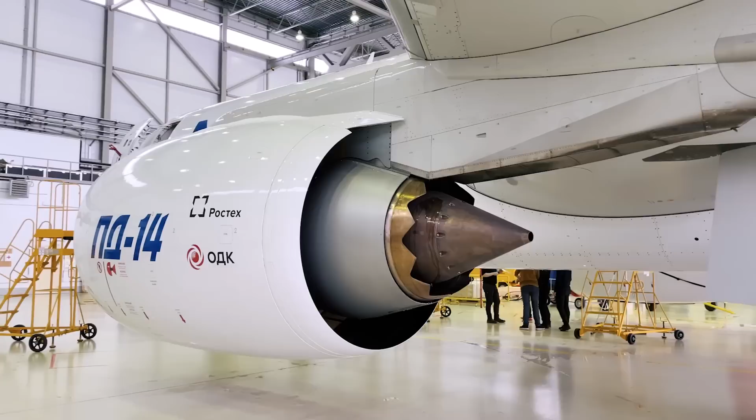Today we will get acquainted with the first completely new Russian civil aircraft engine in several decades, find out what solutions and technologies it has incorporated into itself, and how it pulls forward not only the aircraft, but the entire industry. I present to you the PD-14.

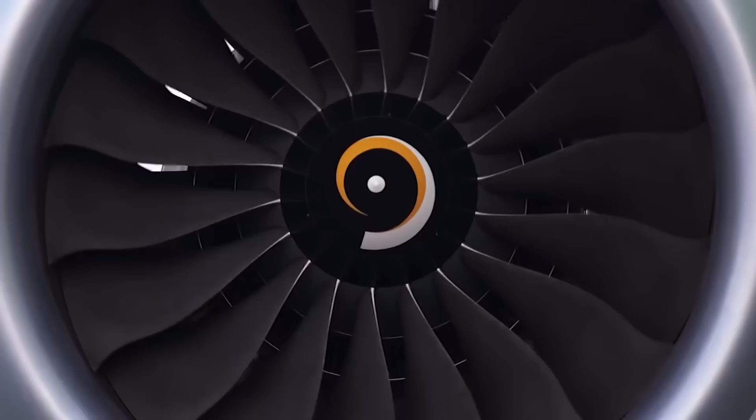Despite the fact that the PD-14 started flying recently, its history is quite long and full of adventures. In the late 2000s, the SSJ-100 airliner entered the home stretch before the start of deliveries. A completely new modern regional jet, ambitious but without extremes. However, progress is necessary, and having created the Superjet, the aviators decided to make a medium-haul jet and enter the market with the largest volumes, which has long been ruled by the Boeing 737 and Airbus A320.

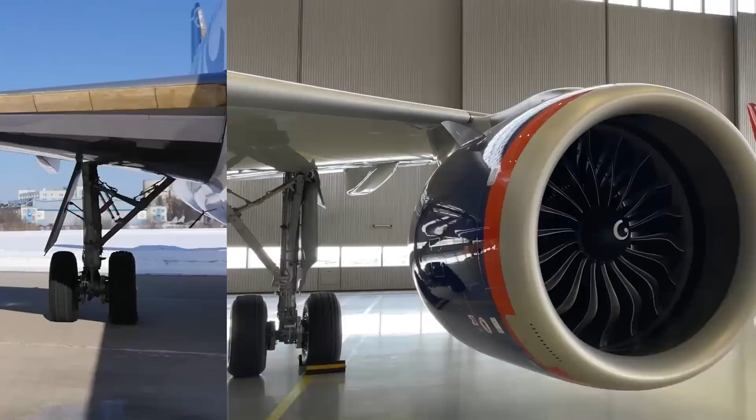Moreover, they had to fight for this market with their new generation, and the MAX and NEO are Goliaths, the main trump cards of which were the latest aircraft engines. The future MC-21 airliner was supposed to be a huge leap forward, and the engine issue was one of the most important. The bar is clear, the power plant must be at least at the level of competitors, otherwise no matter what the plane is, no one will need it. The first and most obvious decision was to install the same engines as the competitors. And it was accepted. The MC-21 is offered with a Pratt & Whitney motor, one of the leaders.

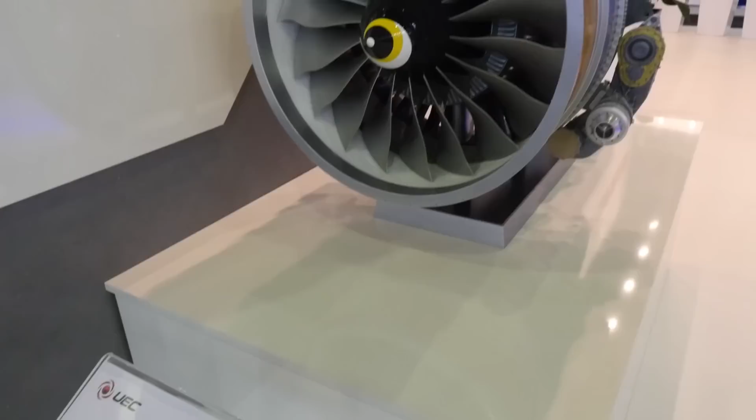However, at the dawn of the program in 2008, the newly formed United Engine Corporation, UEC, proposed another road that the aviators decided to take, to create another engine, a Russian one. In the beginning, this decision seemed like a gamble. The engine that had to be created had no right to be inferior to counterparts, and the counterparts, the most advanced motors in the world, are the results of decades of evolution within the walls of huge corporations. There are only a few of them in the world. It seemed that the Russian engine-building industry, which had been in a semi-comatose state for a long time, simply wouldn't catch up with them. While the world giants of the industry had to take 3 steps, the UEC would have to take 10. But the project nevertheless was launched.

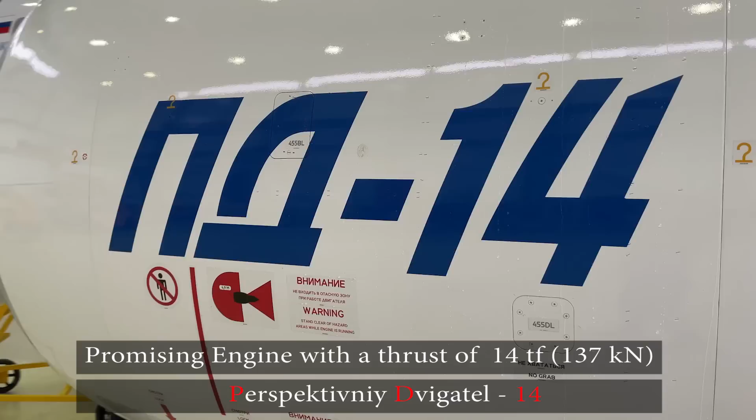Considering that the engines are intended primarily for the MC-21 family, which includes several airliners of different dimensions, the thrust of the engines for them ranged from approximately 123 to 153 kilonewtons. The promising engine, in Russian Perspektivny Dvigatel, with a thrust of 137 kilonewtons or 14 tons force, was supposed to become the base one, and this is how the name PD-14 appeared.

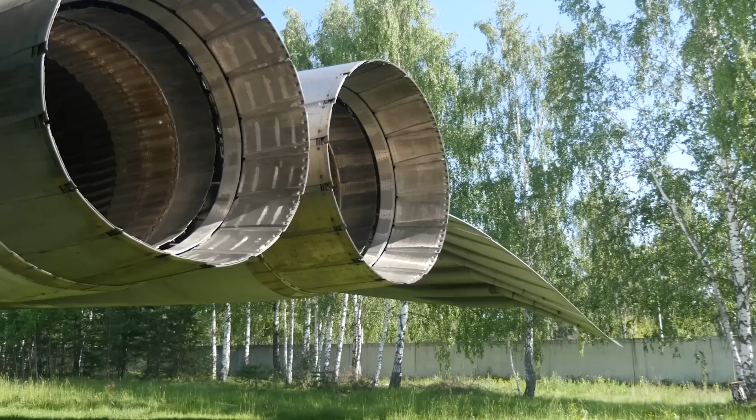And now a cold shower. I will not be telling the success stories of a team of lively adventurers, just as I will not be throwing loud phrases about an incredible breakthrough of an unparalleled mega device, from one sight of which desperate competitors panicked and closed. The creators of the PD-14 soberly assessed the opportunities, problems, and risks. Yes, the accumulated potential is very large, but the lack in a number of technologies is large too, and it needs to be fixed, moreover, in a short time. The best is the enemy of good. No one will wait 20 years for an epic and ahead of its time museum exhibit that never made it to the series as unnecessary.

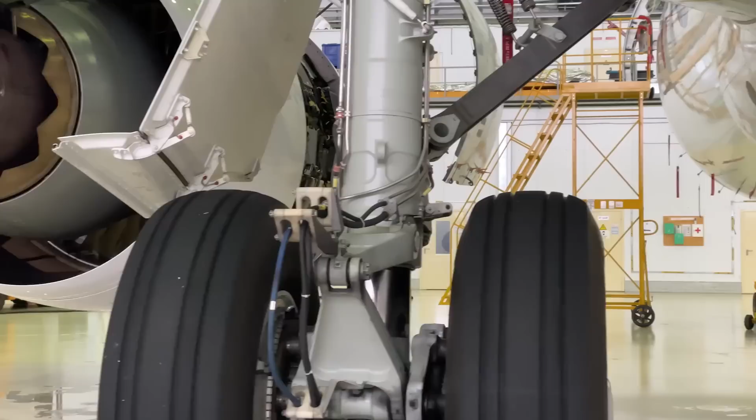So, the task was clear. The PD-14 has to be a modern, efficient, environmentally friendly, and competitive engine. No more and no less. You can't lag behind, but you can't chase incredible innovations and wow effects either. I repeat, the UEC needs to take 10 steps, and any unnecessary risks could kill the project in the bud. Even with a conservative approach, the PD-14 is supposed to be one of the top engines in its class, and a very serious challenge. We're not talking about modifying something that already exists, but about a completely new engine that incorporates both the best solutions available and a lot of completely new technologies that have not been previously used at all. Russian engineers have not had tasks of this scale since the 1980s.

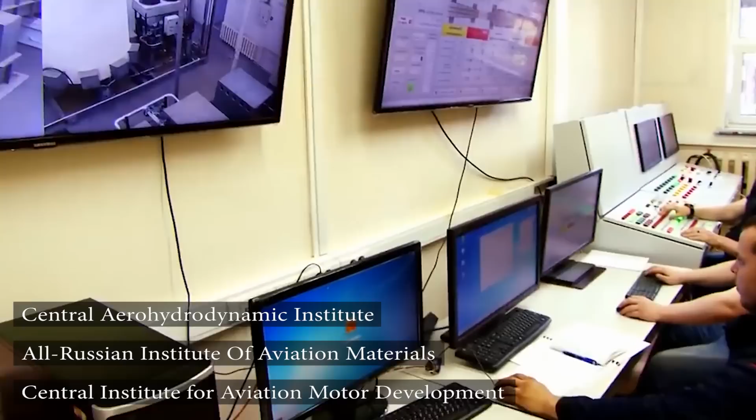Once the program was initiated, the entire industry got involved. The UEC Aviadvigatel became the head design bureau. Related work was deployed throughout the country, including both university labs and giant aviation centers, such as TsAGI, VIAM, and TsIAM. All aspects were worked out, from aerodynamics and computer modeling to mechanization and materials.

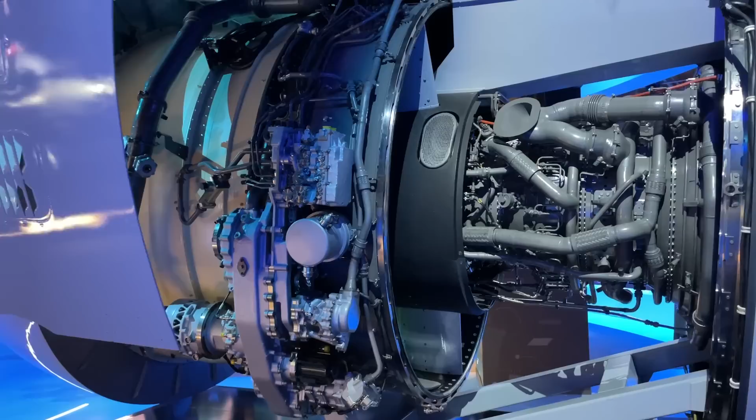At the same time, production workers got down to business. The components of the new engines are being manufactured at many sites, and the main one among them, the place where the finished engines will be born, is the UEC Perm Motors plant. All of them faced a serious modernization.

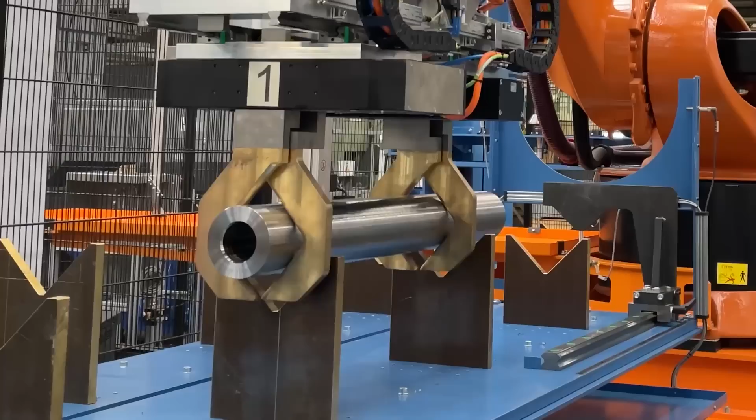The corporation was reformed, the reconstruction of facilities began, centers of competence, new production facilities, and laboratories were created. Personnel was retrained, and the latest equipment was purchased. Thousands of machine tools, robots, and entire platforms. The PD-14 managed to push the whole Russian aviation engines industry forward, even before it lifted the plane for which it was created.

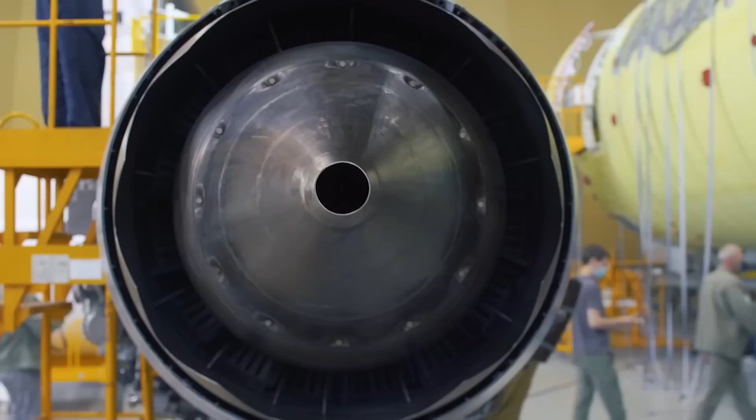Nevertheless, despite the complexity of the tasks set, the work was carried out actively and quickly. Already in 2012, the first prototype for ground tests was assembled, and in subsequent years it was joined by more and more prototype brothers. In 2015, the engine saw the sky from under the wing of the Il-76 flying lab. The main stage of testing was carried out on it, which ended in 2018 with a certificate from the Russian aviation authorities. After that, the PD-14 went under the very wing it was created for.

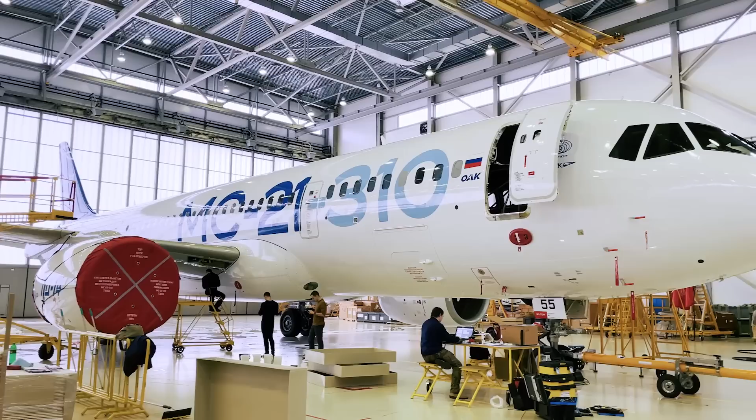The airliner in the basic configuration with the PD-14 engine received the MC-21-310 index, and finally, in December 2020, took to the skies. At the initial stage of testing, pilots behaved more carefully with the engine, but rather quickly they began to push it to the limit, and the PD-14 showed itself quite decently, without limiting them in any way.

The MC-21-310 conducts dozens of tests, participates in demonstration flights, and flies over long distances, including outside of Russia. The Dubai Air Show was the airliner's first overseas tour, and there were no particular issues with the engine's operation. But the tests continue too, and at times with curious stages.

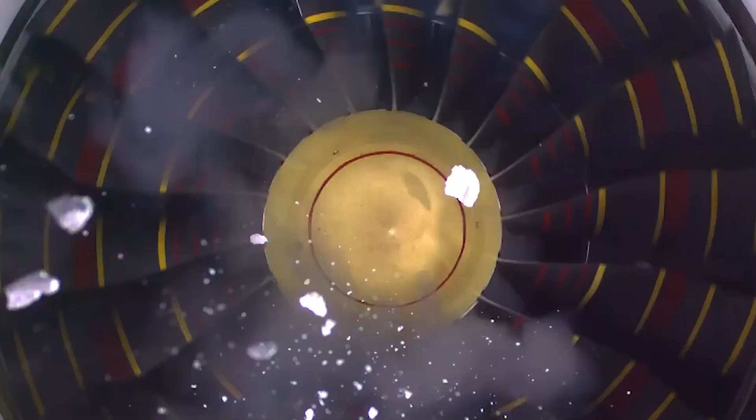Recently there was a test for the reliability of the power plant in flight conditions in clouds of volcanic ash. Previously, no one was particularly interested in such situations, but a volcano erupted in Iceland which closed the airspace of half of Europe. And while the whole world was trying to pronounce the name Eyjafjallajökull, the aviation authorities thought about flight safety. The test became a non-trivial task.

At the stands, the aviators drove real ash of Kamchatka volcanoes through the engine, checking its ability to function in such conditions. And this work was new not only for Russia. New requirements and such tests had not been carried out on a large scale before.

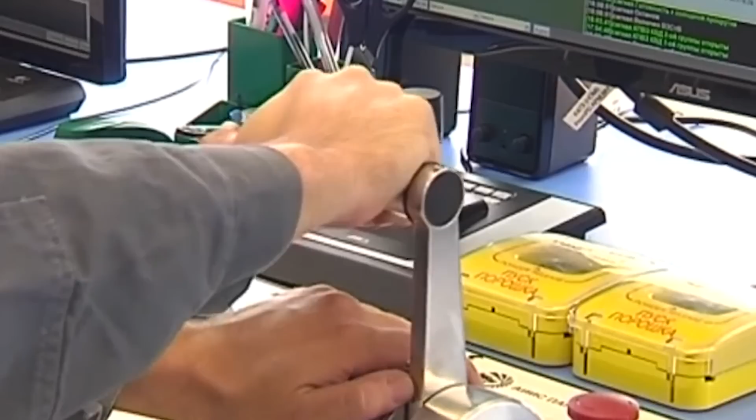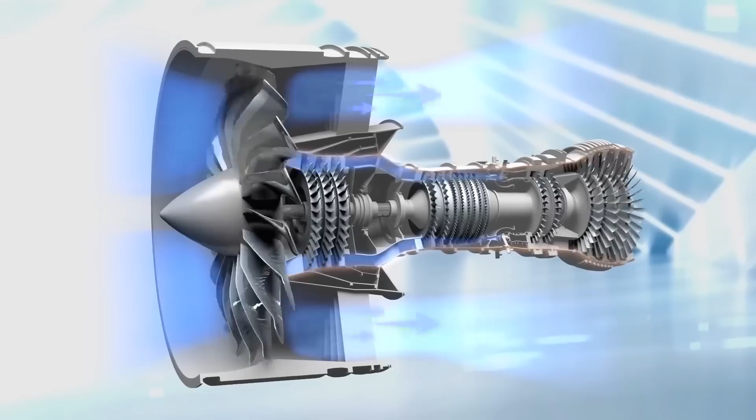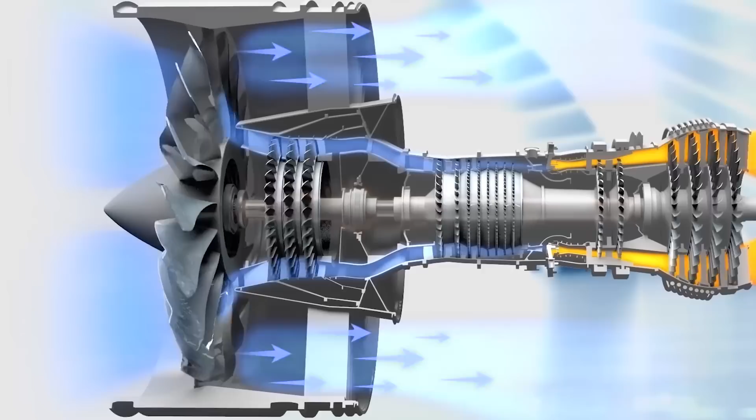And so, let's figure out what this whole industrial dance revolves around. The PD-14 is a classic modern turbofan engine. The airflow in it moves along two circuits. In the core, the air is compressed, ignited, rotates the turbine, and is thrown out through the nozzle, creating thrust. The bypass duct starts with a large fan, which we can see from the outside. The fan spins, forcing air through the circuit, creating additional thrust and increasing engine efficiency.

Now in more detail. Let's start describing the engine from the inside out. The core is the heart of the engine, its hot part. It is thanks to it that the jet engines are called fiery hearts, for they are fiery in the literal sense. The PD-14 is a 5th generation engine, not to be confused with the famous 5th generation of fighters. No one expects these engines to have stealth, supersonic cruise, super maneuverability, and all that.

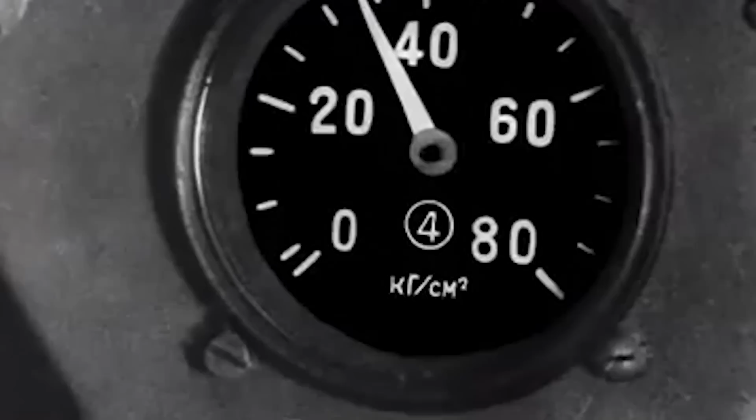One of the main parameters characterizing the generations of jet engines is the temperature of gas coming to the turbine from the combustion chamber. Efficiency depends on it to a decent extent. The early engines that appeared at the end of the Second World War could heat up to 900 degrees Celsius, and over time, by the 5th generation, this bar actually doubled. Meanwhile, the ability to work in this mode for a long time also grew. The first engines were terribly unreliable, dirty, and noisy, and their resource was often at the level of "you can fly a little." Modern engines must run for a very long time, be economical and environmentally friendly.

A balance must be struck between, in fact, opposite parameters. No one needs a super powerful but disposable engine, just like a super reliable mechanism that is unable to lift an aircraft into the air.

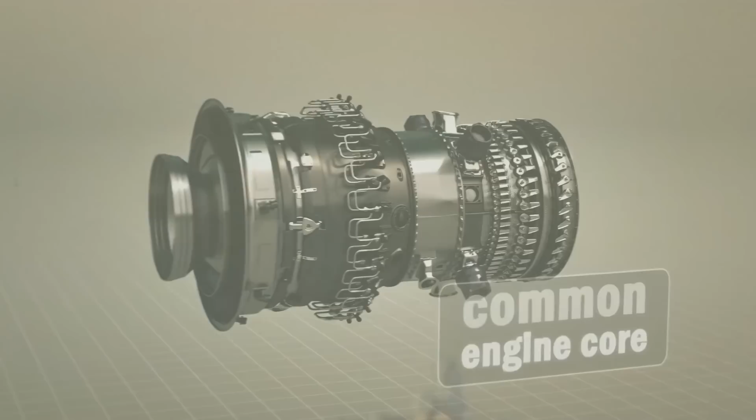In the front part there is a compressor, the task of which is to compress the air passing through it. It is driven forward by stages, rotating disc structures of complex shapes with blades along the circumference, kind of unusual fans. There are as many as 11 of them, 3 low pressure and 8 high pressure stages, and as it moves through the engine, the number of their blades increases, and the volume through which the air passes decreases, like a gorge through which a river flows.

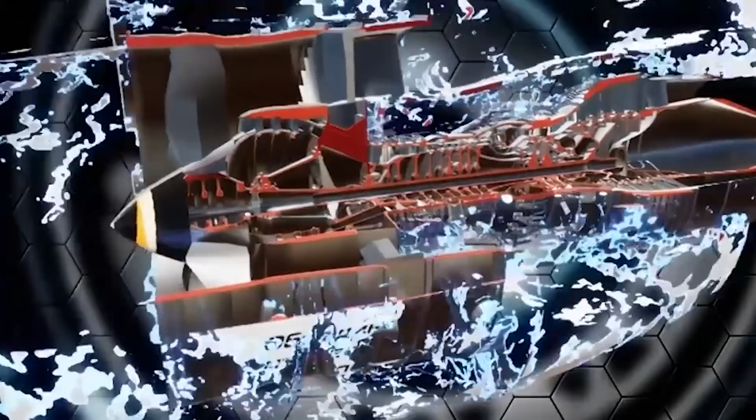Cozy descriptions should not deceive you. This is a roaring machine with discs spinning at breakneck speeds, inside which air in a split second turns from a cool breeze into hot gas, the pressure of which jumps 40 times. Following the compressor is the main hero of this fire show, a low-emission combustion chamber, where fuel is injected into the gas and ignited, heating it to almost 2000 degrees.

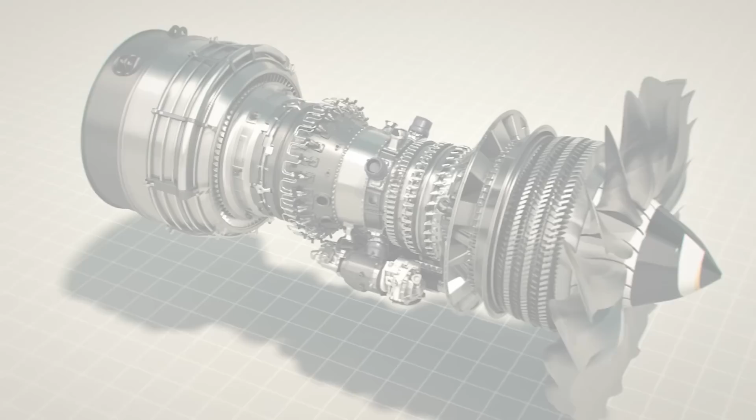The chamber by itself is a work of art. The design, with a very clever flow configuration which includes 48 nozzles, is so complex to build that additive manufacturing is used for this work. Yes, some of the parts are printed from metal by 3D printers. This is not just a desire to simplify production, and not a tribute to industrial fashion. Otherwise, it is simply impossible to make such a mechanism with the required parameters of compactness, reliability, and efficiency.

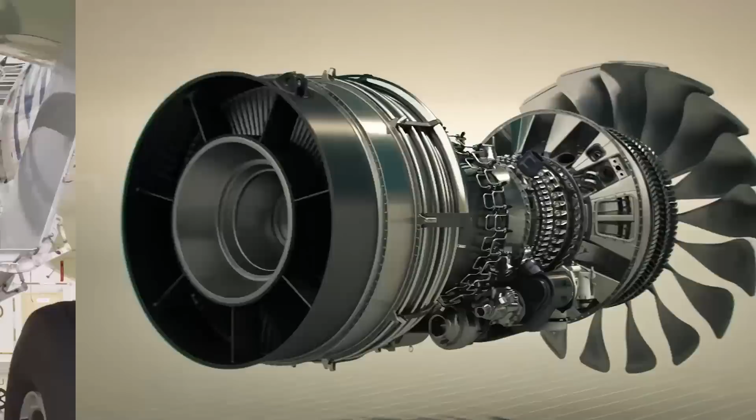In the turbine, the process is, in a sense, the reverse to the process in the compressor. Now, hot and compressed air is bursting through the mechanism, rushing first into 2 high-pressure stages and then into 6 low-pressure stages. Now the gas rotates the turbine, and part of its energy is transmitted through it to the shaft, which rotates the fan and the compressor blades, which in turn compress and drive the gas here. Such is the circulation of energies in the engine. The hot gas that passed through the turbine roars out of the nozzle, creating jet thrust.

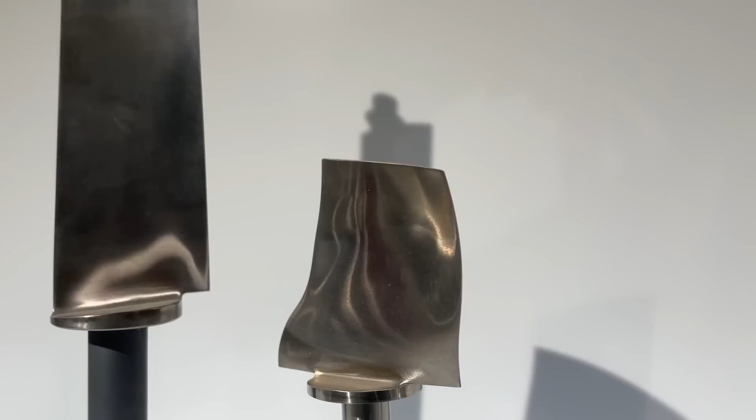The main challenge for engine builders in a core are structural elements in direct contact with the working area, primarily the blades. They must be able to withstand enormous loads without melting or collapsing. There are several solutions to this problem. Specially created high-temperature alloys from which the casings are made. I will not describe the composition, it has half of the periodic table. Inside of these casings there are special channels through which air passes, cooling them from the inside.

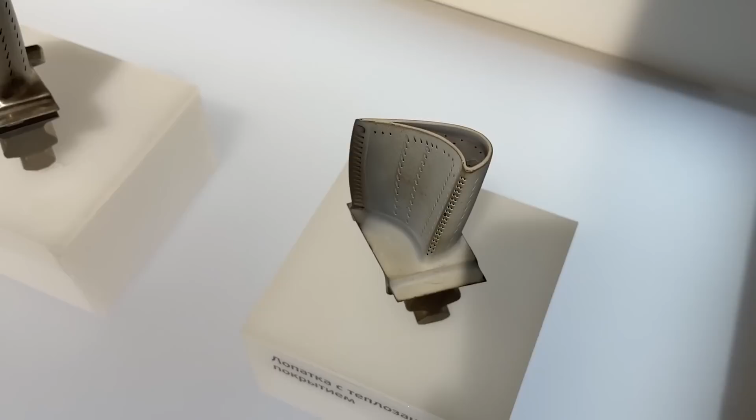As a dessert, there's a special ceramic coating that takes the first blow of heat, something like ceramic tiles that protect spaceships when entering the Earth's atmosphere. These solutions in various combinations allow the blades to work normally. Each blade, and there are hundreds of them here.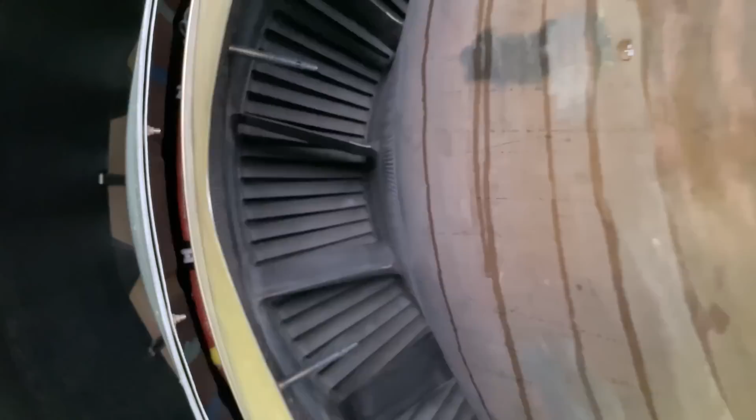So, we examined the core of our fiery heart. Now it's time to step back a little and look at the bypass duct. Everything is simpler here. There is no combustion chamber, there is no turbine, there is only one fan. But it's a big one. The description of the bypass stream of the PD-14 raises a number of questions and often becomes the cause of criticism of the engine as a whole.

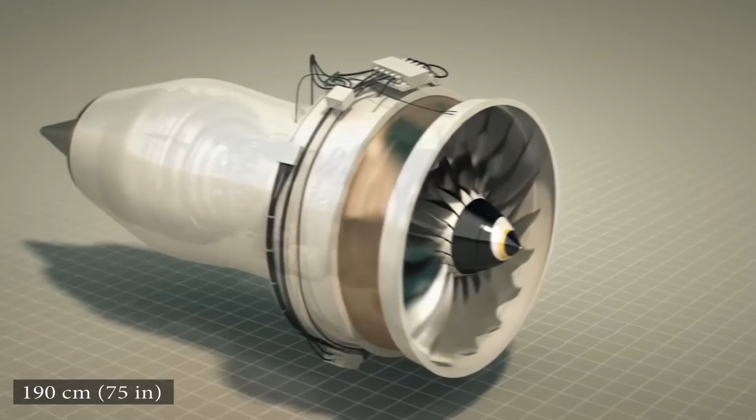2 features raise questions. The fan of the engine is titanium. It has a diameter of 1900 mm, 190 cm. Behind the fan is the main part of the engine, the bypass ratio of which is 8.5. This means that in the PD-14, 8.5 times more air is driven through the bypass duct than through the core. For modern turbofans, an important parameter that engine builders like to point out.

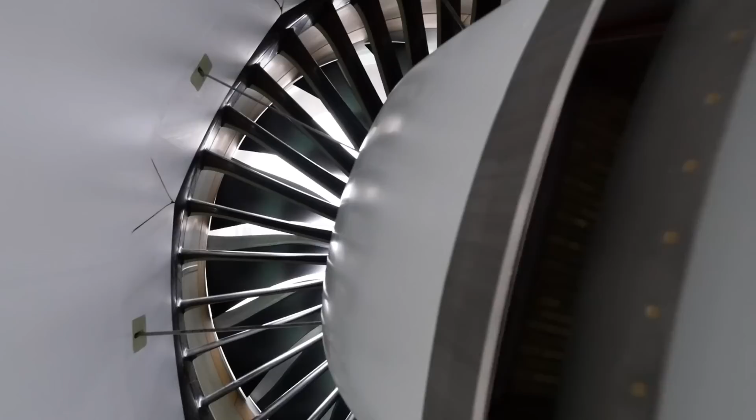And then there's a question. Fans of the competing 5th generation engines are composite and bigger, with larger bypass ratios ranging from the impressive 11 to a wild 12.5. So what's up? These parameters cannot be considered in isolation from the rest, both in the engine itself and in conjunction with the aircraft. The MC-21 introduces a number of requirements for the PD-14, which was created for it. A large fan and a high bypass ratio are good, but they increase the size and weight of the motor as well as air resistance.

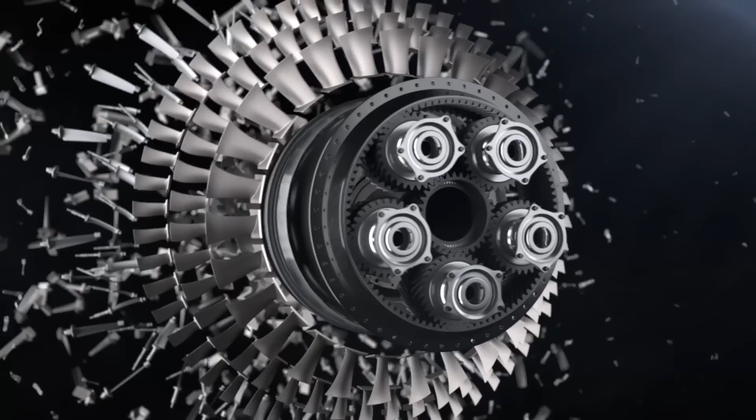Besides, a huge bypass ratio is achieved through the use of special solutions and components that complicated the engines and created a number of problems that gave both manufacturers and operators a lot of headache during the initial stage of operation. UEC, in the struggle for the optimal design, decided not to complicate things, and the performance is still very high. For example, in the engines of the 4th generation in this class, the bypass ratio is at the level of 5 to 6. And the second question.

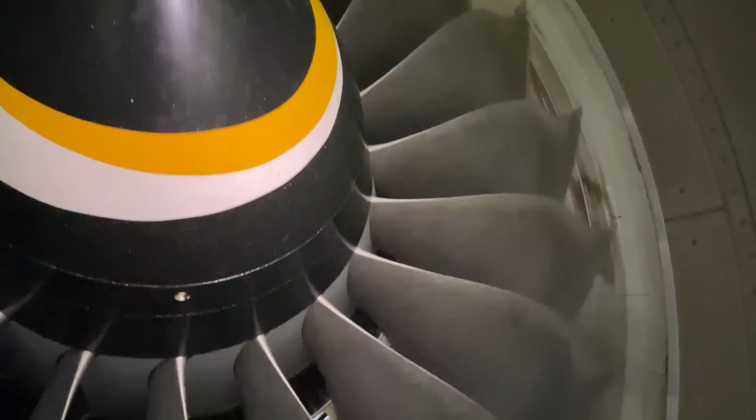The fan of the PD-14 is composed of a group of wide-chord, hollow titanium blades. In the Russian engine building, this technology has not been massively used before, and is being mastered right now. Unlike the conventional metal blades that can be seen on most aircraft engines, the new blades are lighter, larger, have a complex aerodynamic shape, and do not require additional reinforcing elements.

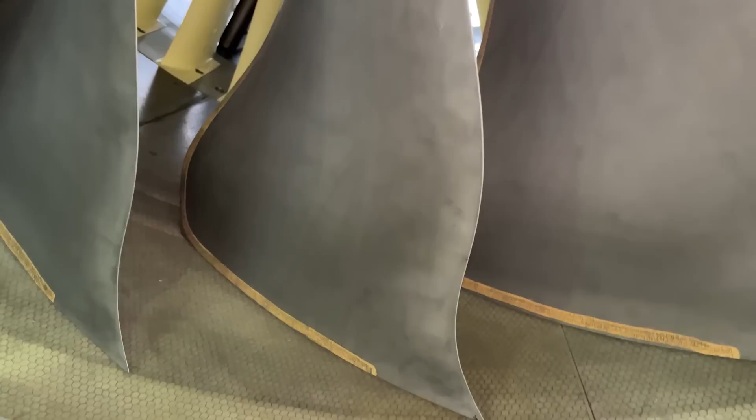Yes, they are still a little heavier than composite ones, but here, again, the question of balance is raised. Composite blades are quite complex and expensive to manufacture, and the weight advantage becomes decisive as their size increases. For example, it is pointless to put composite fans on small motors. You get the same thing for a bigger price. And conversely, on large engines, composite fans are practically the only option. The metal here will be too heavy. The 75-inch PD-14 fan is an adjacent point, at which composites and metals are approximately equal.

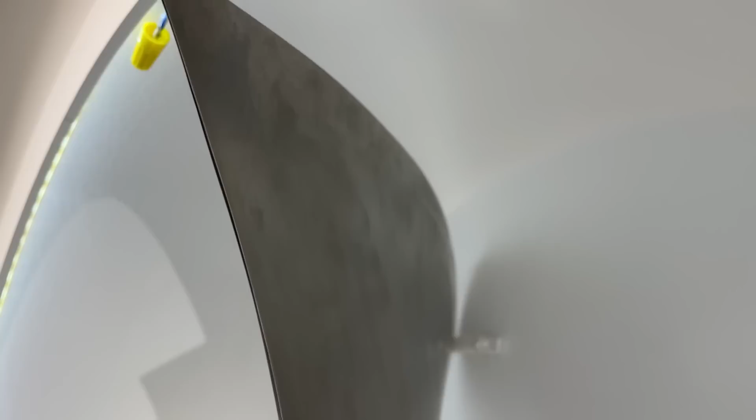The engineers evaluated pros and cons and chose hollow titanium as a more optimal option that can be mastered within the required time frame. In addition, the Russian metal industry is rich in both titanium itself and experience in working with it, including the creation of components for aircraft systems, and it is easier and cheaper to purchase from your own. It would be strange not to take advantage of such a bonus. One more reason, after mastering the PD-14, the small PD-8 will be created, which certainly requires a titanium fan, and the already mastered technology greatly simplifies the work.

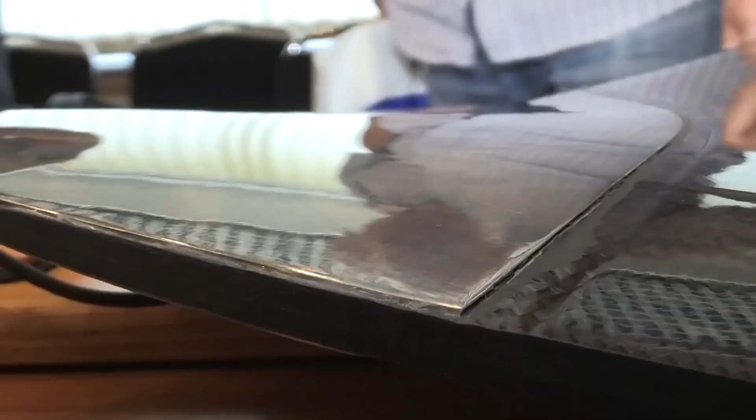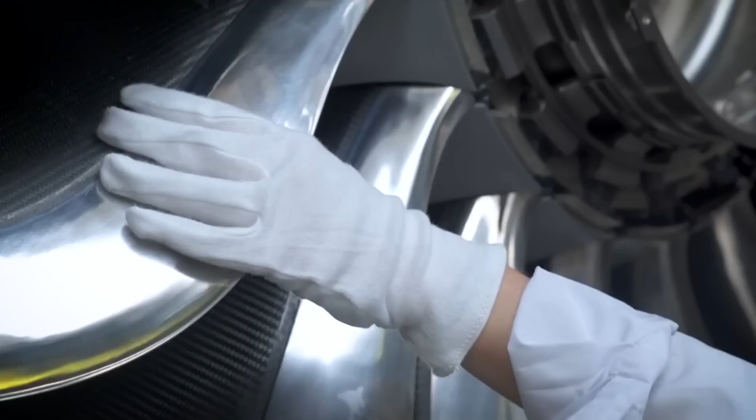The composite blades of large size for Russia are a fairly new technology. For competitors in this regard, it is easier. But you shouldn't think that they are not engaged in them. Prototypes are being created, tested, and will be installed on engines, first of all on the promising large PD-35. And with the development of this technology, within the framework of certain modernizations, the solution may well spread, among others, to the PD-14, if it is really necessary.

How did this affect the engine? The PD-14 surpasses its predecessors in specific fuel consumption by 12 to 16% and in emissions by about 30%. Further, more interesting. Conservatism in the design and a lesser bypass ratio gave both pros and cons, moreover with nuances. The PD-14 probably has a higher specific fuel consumption, but due to the better aerodynamics of the aircraft, it can maintain the required flight speed with less thrust, which reduces consumption. So, in cruising mode, it is close to colleagues in class, slightly falling behind them at low speeds, for example on the ground, on takeoffs and landings.

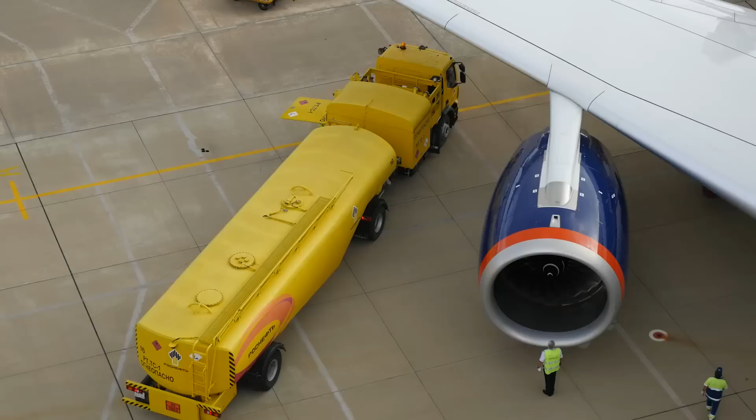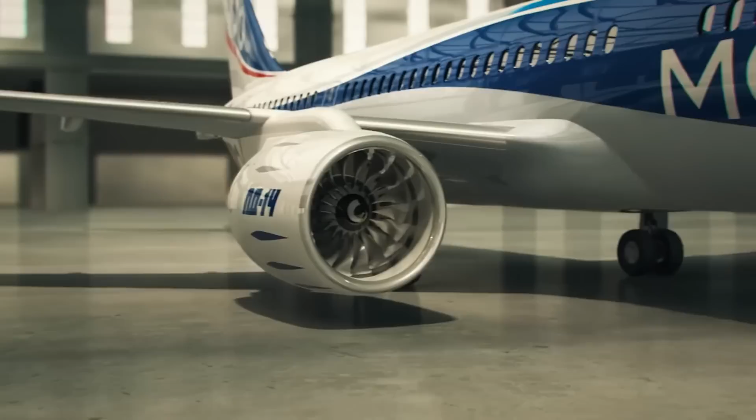In addition, if oil becomes cheaper, the slightly higher fuel consumption won't matter. This is quite realistic, given the trend of decreasing demand for fossil fuels, and the engines are created for decades to come. At the same time, conservatism gives advantages. Proven solutions, better reliability, cheaper elements, and production. The engine itself will be cheaper, both in purchase and in operation. This should keep the PD-14, considering all the parameters, at the level of counterparts. And all this had to be calculated in advance, along with a million other parameters, even before the engine itself was created. This is what you call experience and competence.

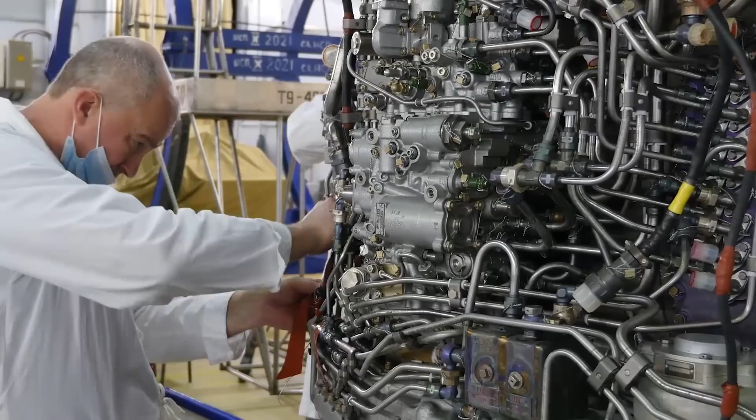Now we're gonna look at the labyrinth of devices, cables, pipes, pumps, and sensors wrapped around the engine. Usually this isn't talked about much, because go figure what all this means. But without all this conglomeration, any aircraft engine is just a beautiful art installation. For a part of this system, automation, UEC STAR is responsible. STAR is not really a name as it might seem, but an abbreviation. Системы топливного питания и автоматического регулирования, or Fuel Supply and Automatic Regulation Systems.

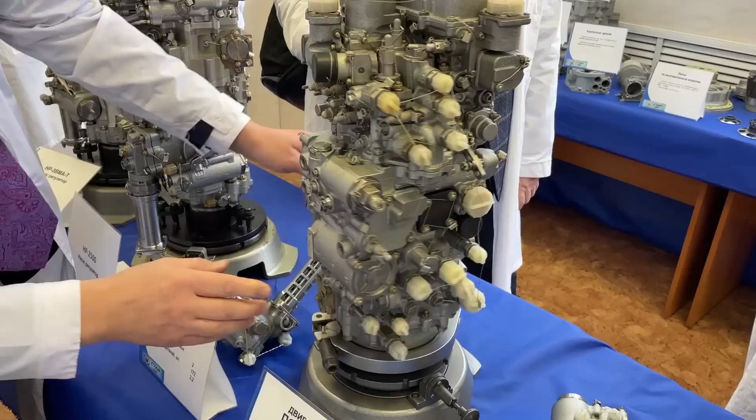Unlike the engine bodies, their brains have their own generations. For example, early motors were driven by hydraulics, which were only helped by electronics. The 5th generation acquired more complex systems, such as FADEC, which were fully responsible for the operation of the engine, and the mechanics were already in secondary roles.

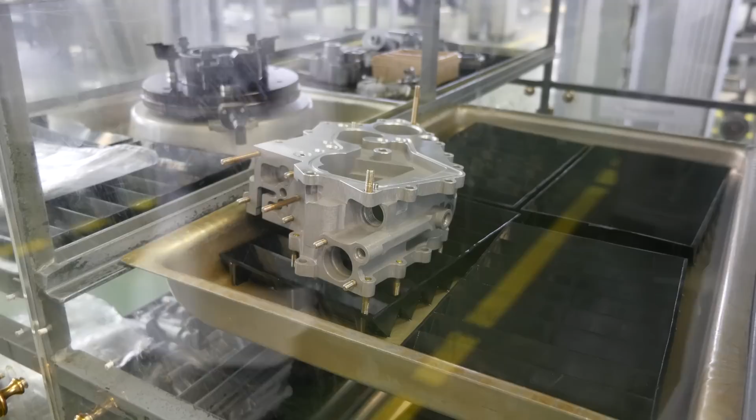The 5th generation uses serious computers with complex software functionality that controls all processes. There are practically no mechanics here. In addition, new materials and technologies are actively used here: lighter alloys, high-temperature mechanisms, additive manufacturing, and immediately with them, bionic design. A new area that allows you to design parts with excellent characteristics and, in some places, unusual appearance.

Soon the engine units will look like they were painted by Alien's father, H.R. Giger, but it should be cool at work. So far the engines don't look like alien artifacts, but progress is evident. For example, here's the electronic regulator of the PS-90 engine, which can be seen under the wings of many Russian aircraft. Next to it is the brother, the PD-14 regulator, a little lighter and much more compact with wider functionality.

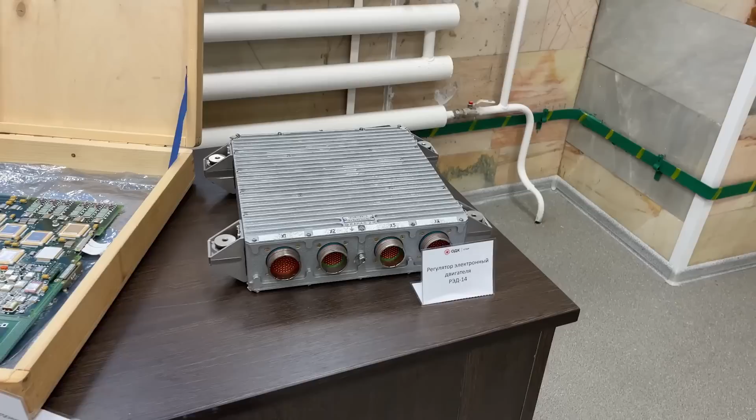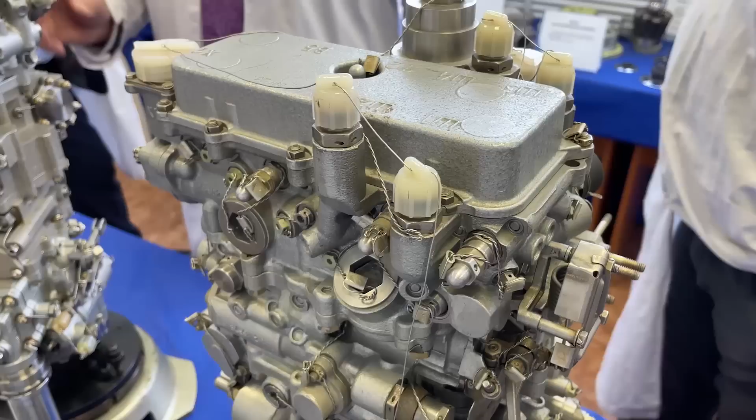This is felt even more clearly in the example of regulator pumps that supply fuel in the engine. If this thing does not impress you, let me tell you one figure. The PS-90A hydromechanical regulator consists of 6,489 parts. A similar unit at the PD-14 is built on the basis of electronic regulators. There are only about 1,200 parts, several times less. This makes the regulator more simple, compact, light, and reliable.

The fuel unit has a resource of 20,000 hours, and the rest of the units 40,000. Such figures have never been reached by Russian engine builders before. To achieve these indicators, stringent tests are carried out. Absolutely all components are tested. Moreover, not only for normal operation, but also in rather harsh conditions. They are shaken on vibration stands, flooded, frozen, and on the contrary overheated.

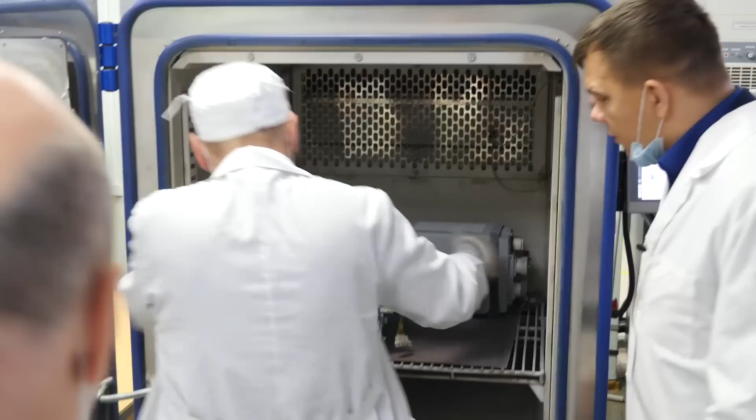The electronic unit was actually burned on the stand, while the engineers heartlessly watched how the decaying computer behaves and whether it transmits inadequate commands to the engine. Curiously, the element base of the engine is almost entirely Russian. The motives are purely practical.

Firstly, no one wants to breed competitors, so critical technologies do not leave the walls of manufacturers. Secondly, it can be difficult to work with large suppliers. If the volumes of contracts are small, they are not taken seriously. Domestic companies, one way or another, manage to organize production of the element base. And with the localization of supplies, the trade wars and the crisis of logistics and electronics driving entire industries into a coma bypass the engine builders.

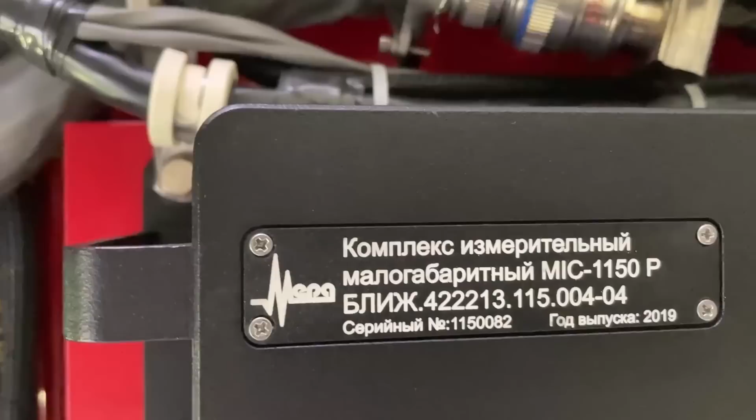Finally, we can look at the engine as it appears to ordinary passengers. The PD-14 nacelle, covering the mechanisms and providing aerodynamic flow, is made of composite materials and is also created in a division of UEC Aviadvigatel. For all the external simplicity, the structure is very complex, especially considering the aerodynamic component, airflow, and interaction with the pylon and the wing. An error here can seriously impair the performance of the airframe.

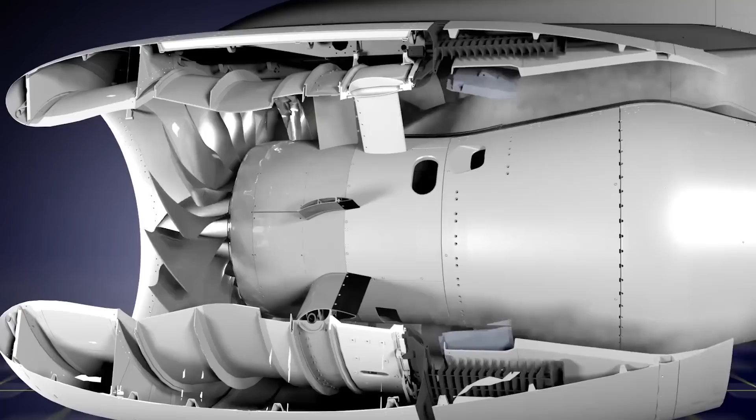Naturally, the engine is equipped with a thrust reverser. This is a special mechanism that, at the moment of landing, turns the airflow around and slows down the aircraft. These mechanisms are diverse, and on the PD-14, a sliding version is installed. When a part of the nacelle fairing is displaced slightly backward, inside, the blades blocking the flow move out and the air rushes forward. On the PD-14, the mechanism is lightweight, made of composites, and is powered by electric drives. This has not been done in Russia before.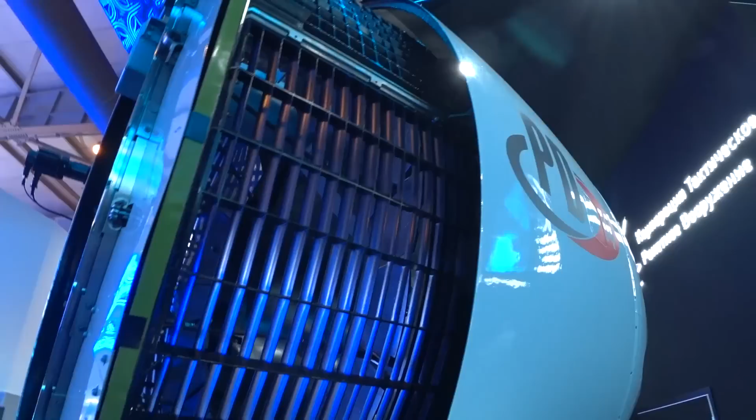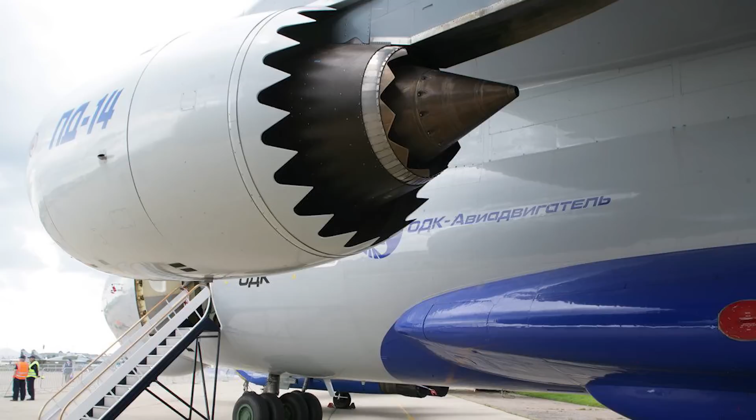Another external element of the engine is the chevrons. The sawtooth end of the circuit ensures smooth mixing of airflows, which reduces the level of noise resulting from it. Quite a fashionable solution. The PD-14 previously assumed the installation of chevrons on both circuits, and they were even tested, but over time the outer one was removed from the second circuit. The engine was originally designed in a way to minimize noise, and this turned out to be enough to meet modern and future requirements. An external chevron was not needed, and no one wanted to install a complex structure just for beauty. On the nozzle, however, the chevron remained, and now flies.

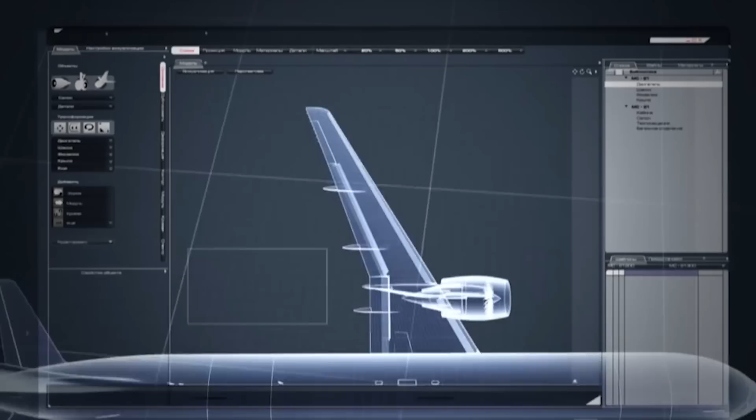The PD-14 is being created for the MC-21 airliner, but thanks to the gigantic volume of developed technologies and the overclocking of the entire industry, there is no doubt that it will not be alone for long. The basic PD-14 develops a thrust of up to 137 kilonewtons and will be installed on the basic MC-21. The heavier version of the airliner will receive the forced PD-14M engine with a thrust of 153 kilonewtons.

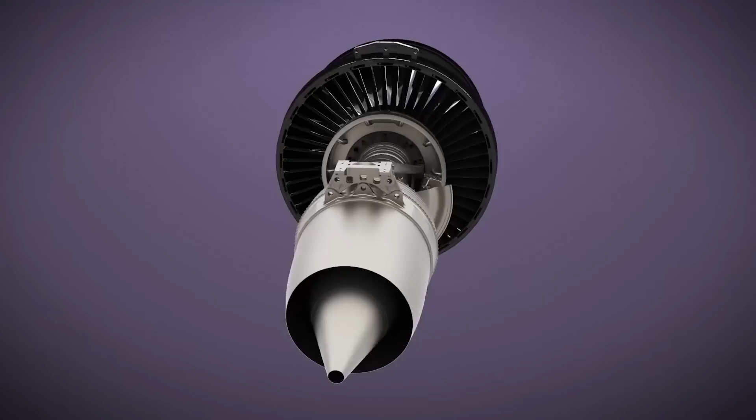In addition, the use of proven technologies and solutions makes it possible to create other engines, first of which will be the smaller PD-8 with a thrust of 77.5 kilonewtons for the updated Superjet. And of course the PD-35 with a thrust of 343 kilonewtons, which is being created for heavy aircraft, primarily wide-body airliners. Magnum opus of the UEC. Nothing like this has ever been created, either in Russia or the USSR. The PD-35 program is actively developing, large-scale research is underway, and some units are already being tested.

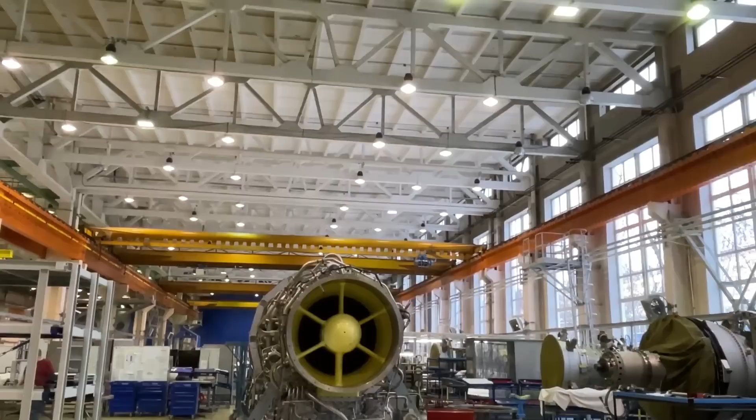Plus, Perm Motors, being the largest developer and manufacturer of power plants for the energy industry, having created the PD-14, could not say no to the idea of making its ground version. It became the PD-14 GP1 and 2, industrial power plants for power stations and gas transmission units with a capacity of 12 and 16 megawatts in 2 versions, which will be 8% more economical than their predecessors and much better in terms of ecology. And they are very much awaited. The forecast demand for these power plants until 2031 is about 210 units.

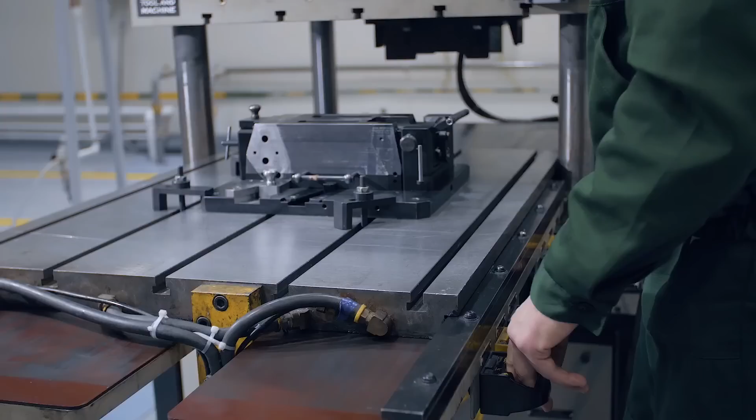The re-equipment and modernization of production, started together with the PD-14 program, continues to this day, and its scale is very serious. Even now many sites continue to receive equipment, so it shouldn't come as a surprise that in the workshops, continuously operating machines stand next to huge boxes with their not yet unpacked relatives. For example, in Perm, a competence center is being created for the production of engine shafts, the very parts holding the entire circuit, and the requirements for quality and accuracy are very high here. The plans to increase the output are very serious, while now 300 of them are being made per year. After the full launch of the entire line, 1,500 units will be coming from here annually.

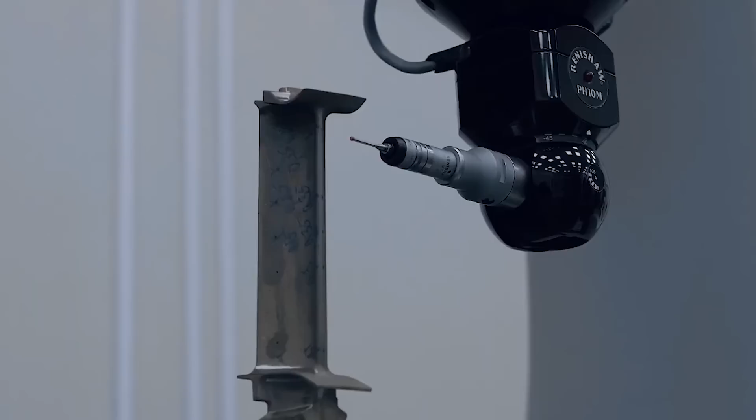The same thing is happening with advanced production facilities, which, in fact, are created from scratch. The same 3D printing from local solutions for some parts is growing into full-fledged centers of additive manufacturing. And such a picture can be seen at many objects of the UEC and Rostech throughout Russia. A multi-fold increase in production volumes over the next few years here are quite normal and realistic plans.

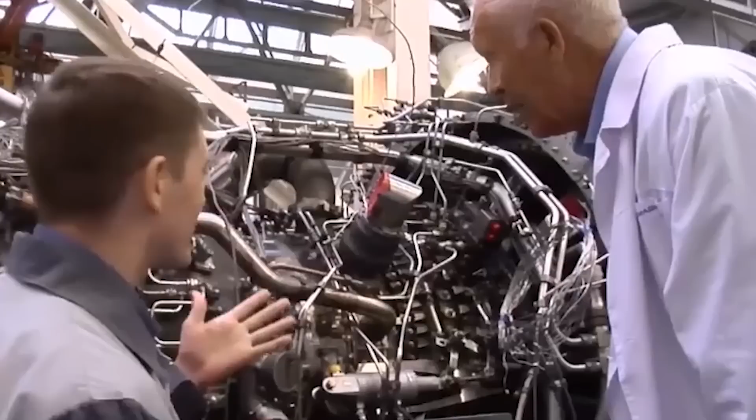Another subtle factor that is no less important than any other is after-sales support. Nobody will want even the best plane in the world if after every minor breakdown it will spend weeks in repair, waiting for a spare part. The creators of the MC-21 and PD-14 understand this perfectly well, and given that the advantage of the new engine is the low cost of the life cycle, this factor becomes critically important, so the service infrastructure is being created right now. As part of the UEC, repair sites and training centers are being created, starting directly with Perm Motors and further in the required regions.

Large-scale work is underway to organize logistics, pools of replacement engines, spare parts, and all other support elements. The basic infrastructure should be ready by the time the first PD-14 under the wing of the MC-21-310 arrives to the first operator. Further plans are variable and will be implemented depending on demand.

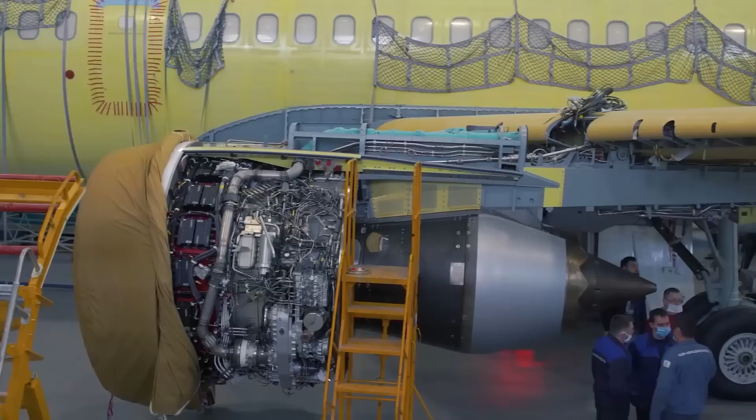By the end of 2021, Perm Motors assembled almost the entire testing batch of engines, the earliest of which were sent to the test sites, and the new ones are already flying on the MC-21. With the launch of serial production, the output will increase. The potential is quite large. Here a lot depends on the engine builders and on the aircraft themselves, the rates of their production and deliveries. Let's hope that everything goes as it should, and soon we will see hundreds of representatives of the family of fiery hearts, whose father was the PD-14.

Enzo Ferrari once said, "I don't sell cars, I sell engines. The cars I throw in for free since something has to hold the engine in." I don't think the MC-21 will be given away for free, but its most important part is the engines, ready for the great and glorious era of travel in the skies of this blue ball.